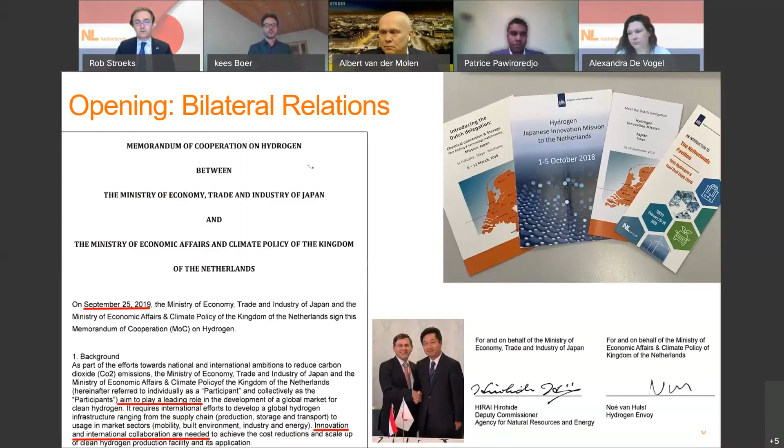I hope many participants today also listened in on the third hydrogen energy ministerial meeting held the day before yesterday, organized here in Tokyo by the Japanese government. I'd like to share a few takeaways relevant for our bilateral relations.

Four points. First, in the opening, the Executive Director of the International Energy Agency, Mr. Birol, announced three good pieces of news. One was that Mr. Noé van Hulst, who signed our MOC and was our Netherlands hydrogen envoy at the time, was announced as the new hydrogen advisor of the IEA. This is very nice news, I think.

The second takeaway was that our Minister of Economic Affairs and Climate Policy in the Netherlands, Mr. Eric Wiebes, gave a video message of four or five minutes, basically saying that the Netherlands is stimulating investments and innovation in hydrogen, putting the Netherlands on the map as a hydrogen hub and an important country in the EU in terms of backbone infrastructure.

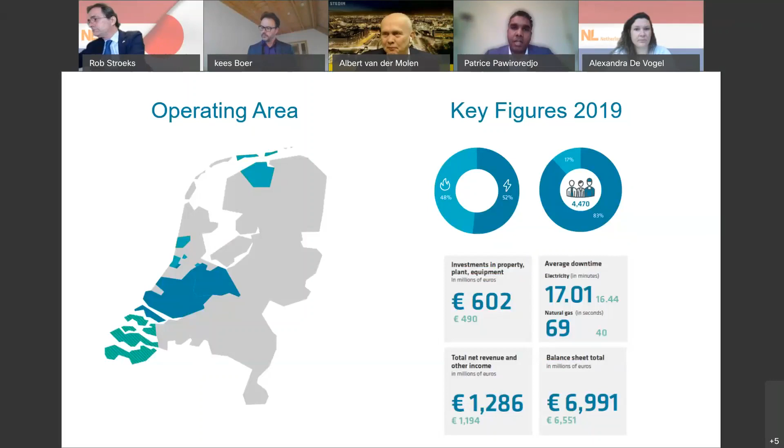So why are we interested in hydrogen? As you all know, the Netherlands has signed the Paris Agreement and translated those goals into national goals. Looking at the second target from the left, in the built environment in the Netherlands we need to reduce greenhouse gas emissions by 3.4 megatons by 2030, almost a 50% reduction. It may seem like the smallest target, but it's one of the most difficult to achieve because it's such a diverse area.

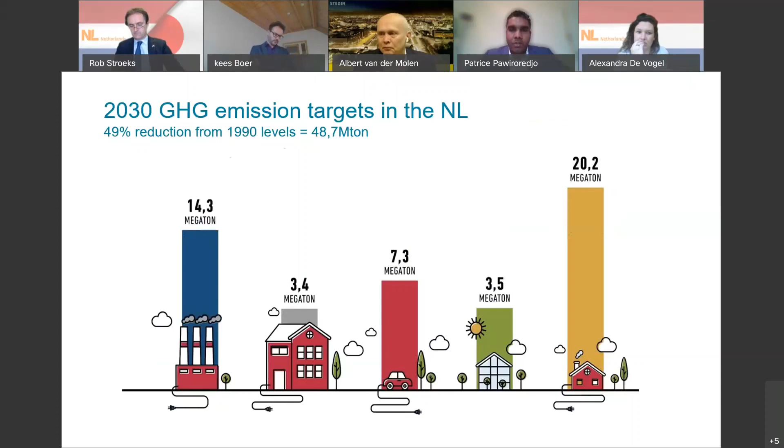Let's zoom in on that. It's well known in the Netherlands that we have very well developed and well-meshed gas connections. Almost every building in the Netherlands is connected to the gas distribution grid, which we see as a substantial asset for decarbonization. But we also have a relatively old building stock—more than half of the buildings are older than 45 years, and a significant part are older than 75 years. That presents a significant challenge for us.

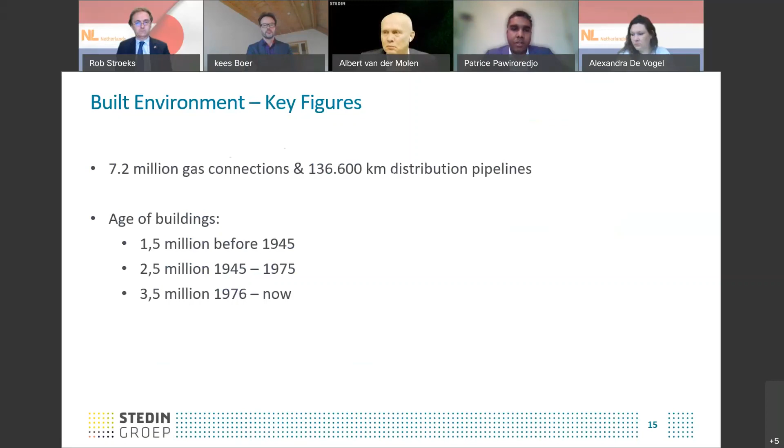The problem with these buildings is they're very old, and most will still be around in 2050. We need to find a way to transition the heating demand for all those buildings by then. By the end of next year, every municipality in the Netherlands needs to have a plan for an alternative to natural gas to heat the built environment in their area. From Stedin's perspective, we will investigate which options present the lowest societal cost in a specific area.

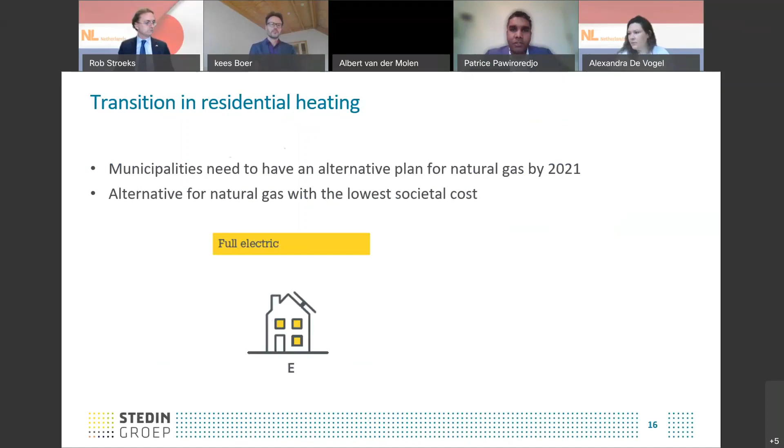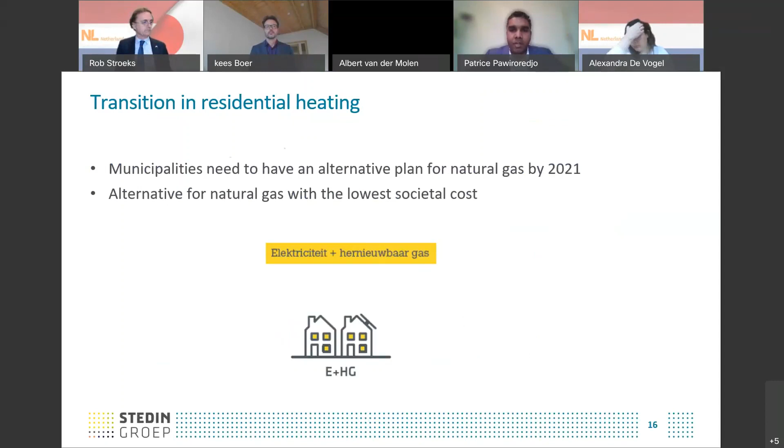Of course there are several options. You can go full electric and electrify all the buildings. You could go to electricity combined with a distributed or central district heating system. Or you can go to sustainable gas, making use of the current infrastructure.

At Stedin, we started to analyze all the neighborhoods in our area, and we came to the conclusion that if you look at the purple color in the pie charts, you can see that a sustainable gas solution could be the option at the least societal cost for a significant part of our surface area. So that's something we really need to investigate further: how are we going to operate that option of sustainable gas in our surface area?

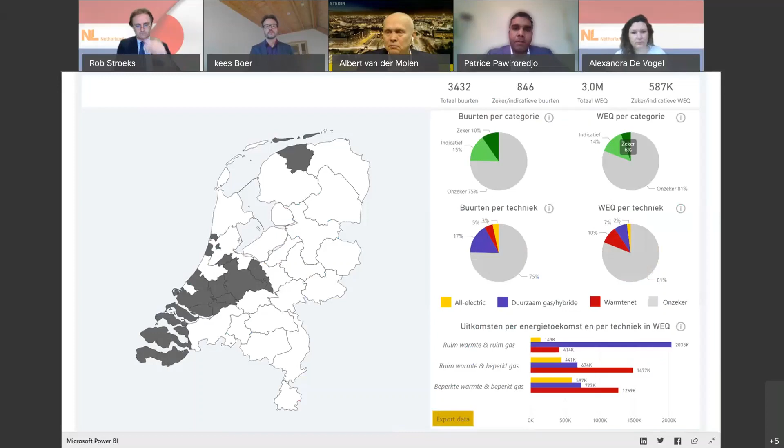So for hydrogen, specifically as sustainable gas, what are we doing to develop the capabilities to implement hydrogen in the built environment?

The goal of our innovation program is to develop the capabilities for the distribution of 100% hydrogen using the existing natural gas infrastructure in the Netherlands. The goal we've set, the point on the horizon for our program, is that in 2025 we want to convert the village of Stad aan 't Haringvliet to 100% hydrogen, from natural gas to 100% hydrogen, using the existing gas infrastructure. It's a village of about 600 houses and also some utility buildings. That's the program we're going to work on in the next five years to develop the capabilities to convert this village in the Netherlands.

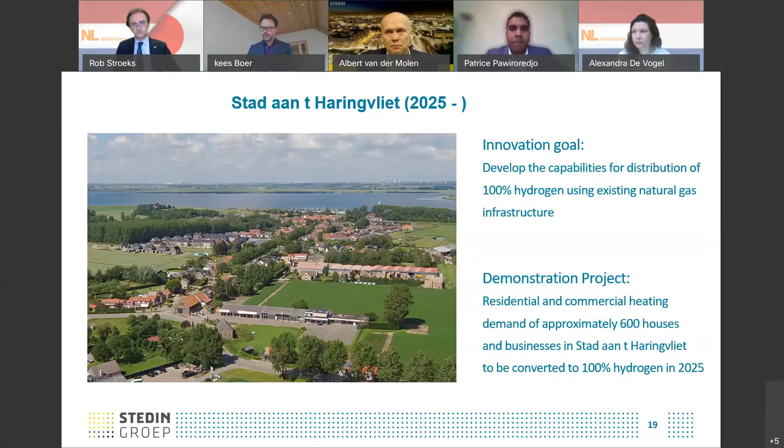Some of you are familiar with some of the steps we're putting in the meantime. One of those steps we started last year is the pilot location for the 100% hydrogen boilers. Some of you have visited already and are familiar with this program, where we have 3 hydrogen boilers at the moment being tested by Remeha, Bekaert, and Gastec. That's the first step we started last year.

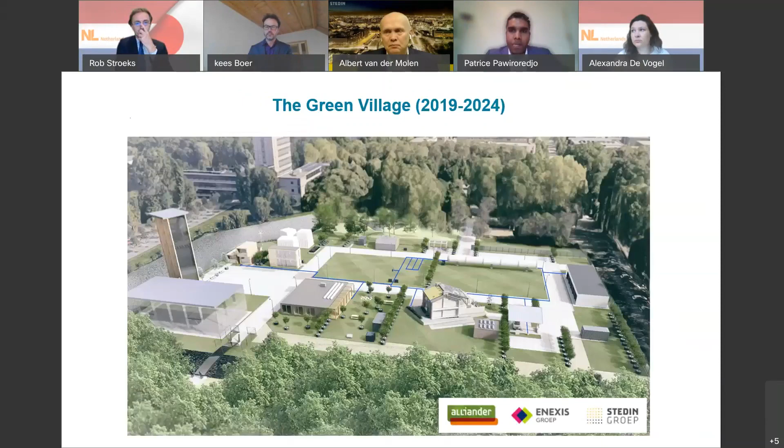At the Green Village, on the campus of the TU Delft, there's an experimental village, and what we're doing there, we are pleased to announce that we are in the startup phase of this project to get hydrogen flowing. We've constructed a natural gas grid as we would do normally, and we're going to transport hydrogen using the components of the natural gas grid. So you can see the regular components and materials we would use in the natural gas distribution grid in the Netherlands being tested for the transport of hydrogen. It also gives our colleagues and technicians a chance to really develop practical skills in working with hydrogen, and develop working operations and safety measures to work with hydrogen in the built environment. This is a project we're very enthusiastic about, and we hope to get it started by the end of this year.

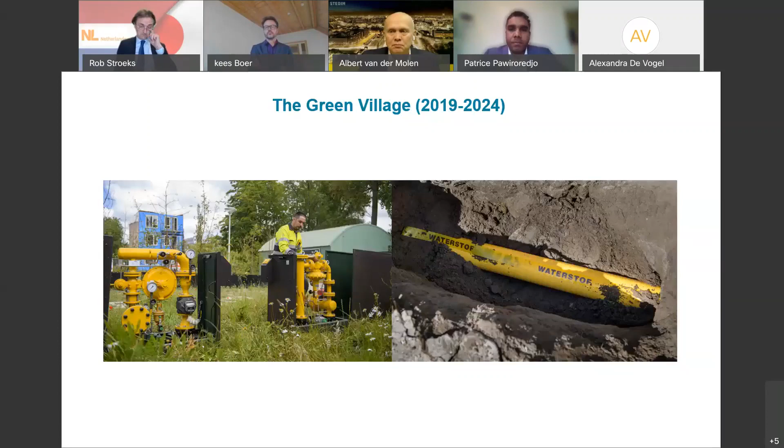Another project we're starting, actually next Monday I think, is that we are going to convert 14 abandoned houses in the city of Uithoorn. These are houses that are going to be demolished and are not inhabited at the moment. The part of the gas grid that supplies these houses will be sectioned off, and we're going to do some practical tests to see what kind of steps we need to take to convert an actual gas grid and actual houses to 100% hydrogen. With that, I'd like to share a short animation about the project that will be starting next Monday.

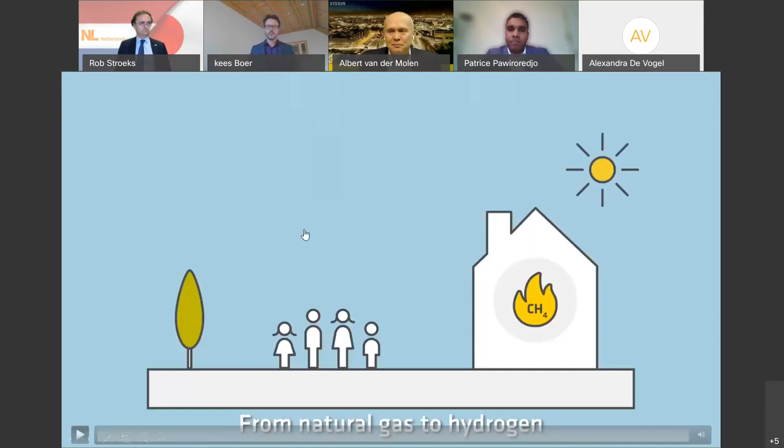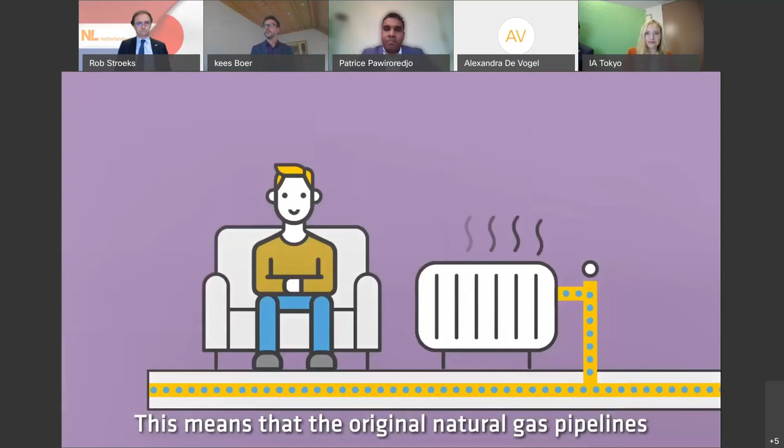From natural gas to hydrogen: this is how the conversion works. As a way of reducing CO2 emissions, the Dutch government is planning to stop the use of natural gas in homes by 2050. This means that the original natural gas pipelines can still be used to heat our homes in a sustainable manner, for example by using hydrogen gas.

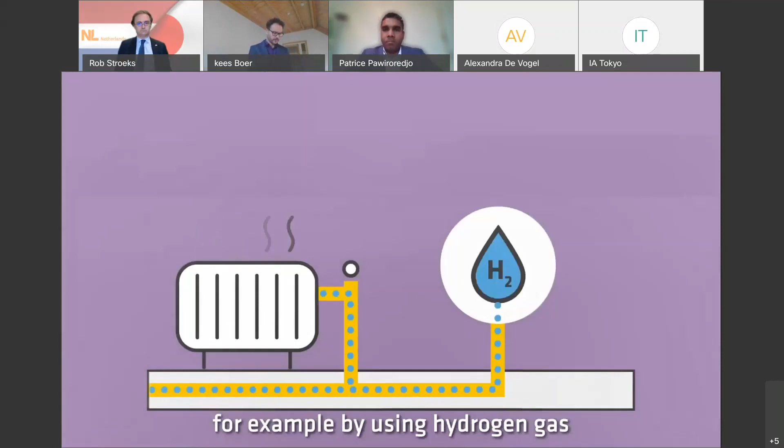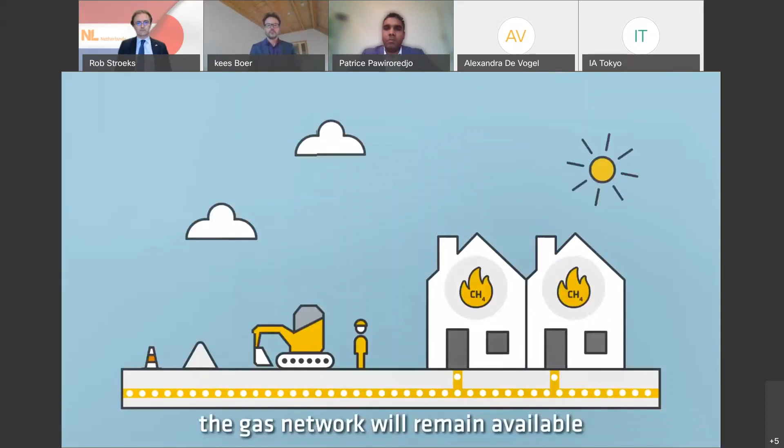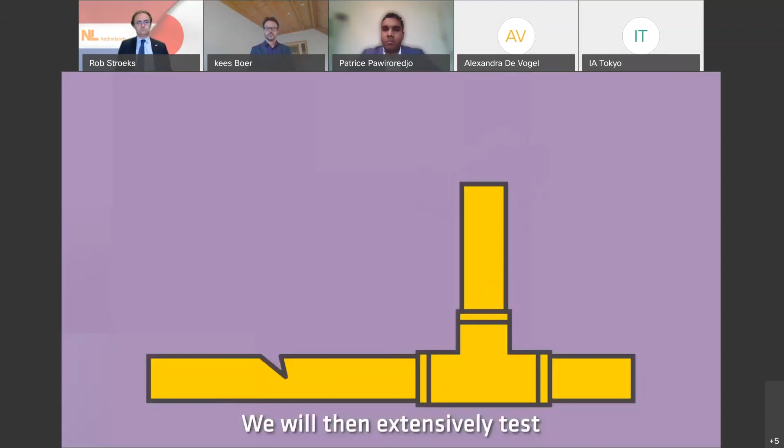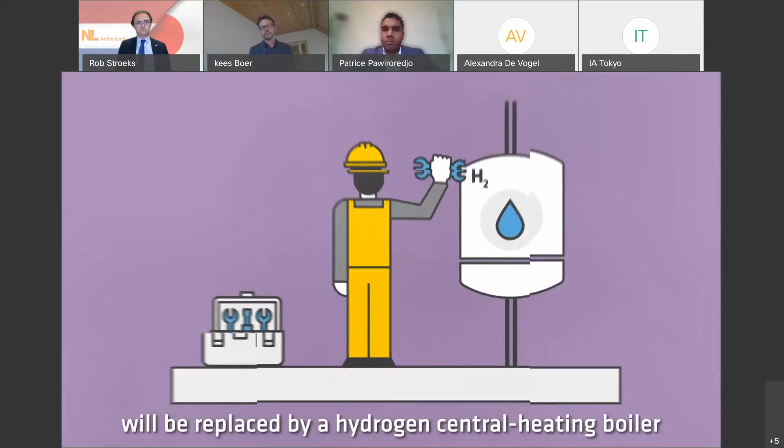For this reason, we will convert a number of unoccupied houses for a short time from natural gas to hydrogen, using the existing natural gas pipes in and around the houses. This allows us to gain experience and find out how long it will take to make a house suitable for hydrogen. During this conversion, the gas network will remain available to the surrounding houses, while the unoccupied houses will be disconnected from the main gas line in the street. We will then extensively test the existing gas network for any leaks. The natural gas central heating boiler in these houses will be replaced by a hydrogen central heating boiler, after which we will transport hydrogen through the pipes to these homes. We will only carry this out during daytime working hours and in close collaboration with experts from the safety region. Extensive research has already been carried out in recent years, and we are collaborating with reputable partners, both in theory and in practice. This is how we can confirm that hydrogen is just as safe as natural gas.

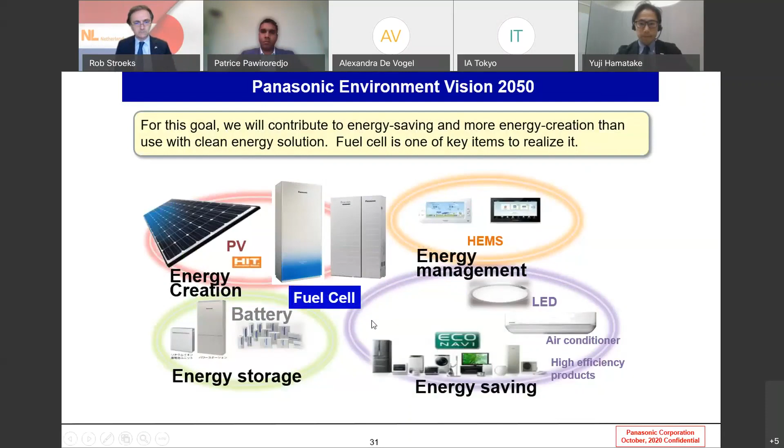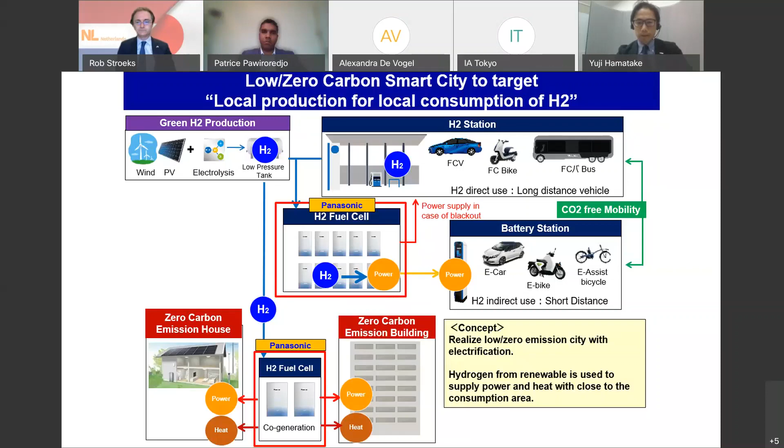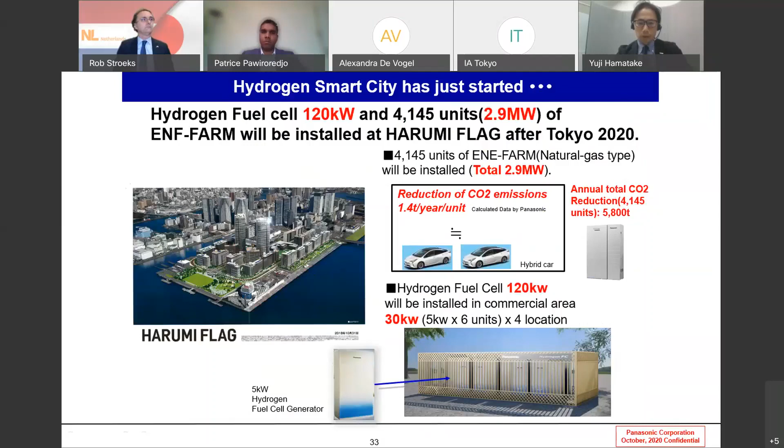This is just one example. A hydrogen smart city has just started in Japan. Panasonic installed a total output of 120 kilowatt hydrogen fuel cell and a total 2.9 megawatt of ENE-FARM, which is a natural gas type fuel cell. These fuel cells can generate both heat and power to contribute to such societies and communities, and can also reduce CO2 emissions—for instance, 6,000 tons from ENE-FARM. So this is a contribution to CO2 reduction.

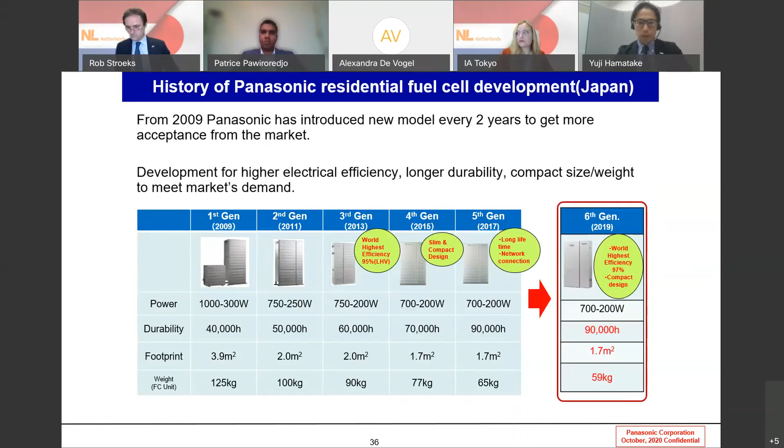With such circumstances, since 2009 Panasonic has been developing a new fuel cell every 2 years to get more acceptance from the market. We are developing to achieve more economical benefits, such as higher electric efficiency and longer durability, and also to meet market demands for physical footprint, realizing more compact size and weight. This is our current development in Japan.

We are also doing business together with our partners as joint development in Europe, like BDR Thermea Group, Remeha, and also Viessmann.

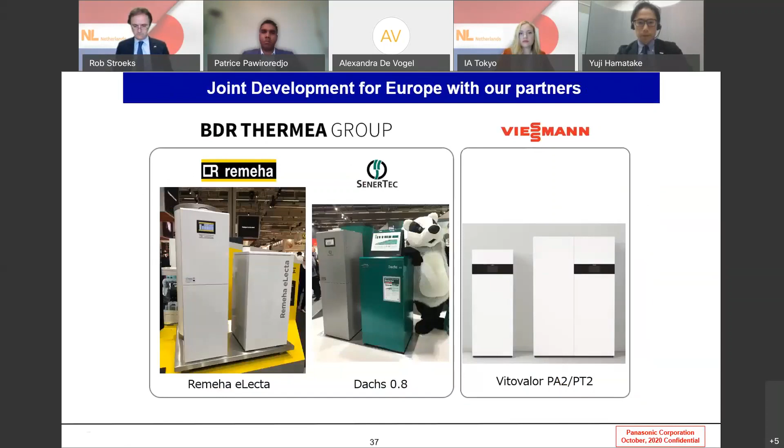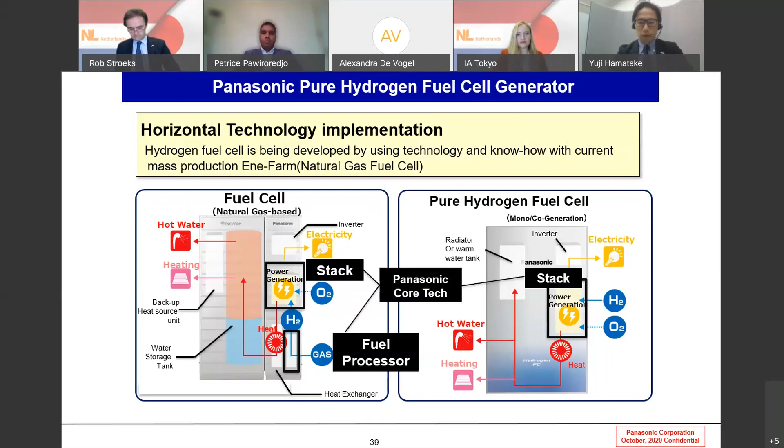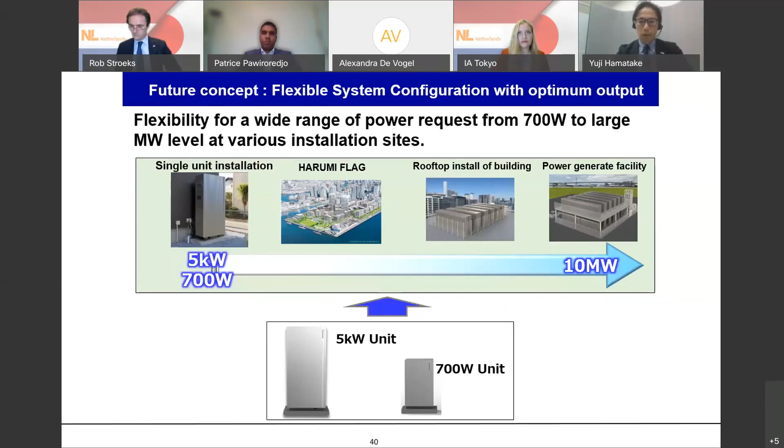This is our current developing model, the 5 kilowatt and also the 700 watt model. The 5 kilowatt model will be launched next October in Japan, and the 700 watt model is planned to launch end of 2022 for the European market.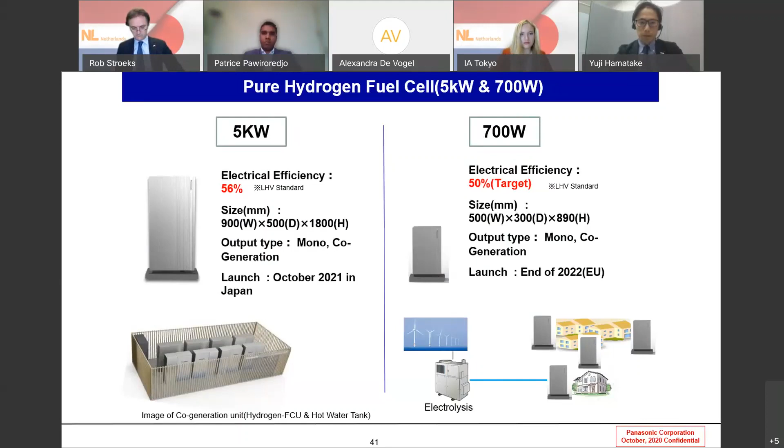We are also doing several field tests for this pure hydrogen fuel cell. This is one case in Yokohama, where we are setting a 5 kilowatt hydrogen fuel cell to supply electric power into the showroom. This is almost 2 years of field test experience.

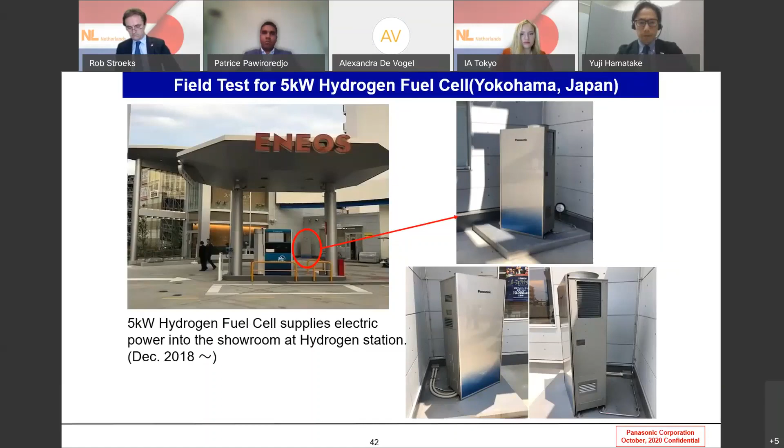This is a case in Yamanashi Prefecture, close to Mount Fuji, as a power-to-gas project. We set up 3 units of 5 kilowatts, total 15 kilowatts, to generate power and use it for the showrooms. This is almost 4 years of field testing.

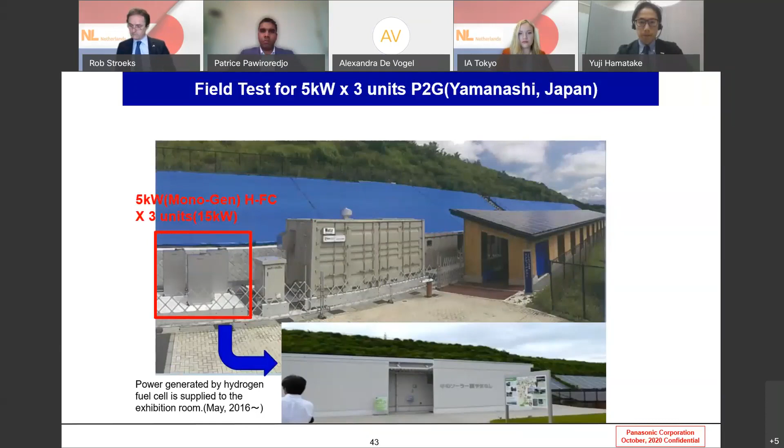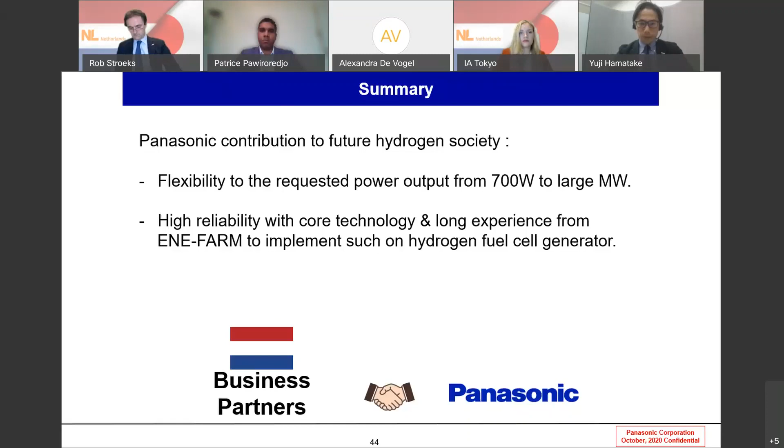This is the last page, a summary. Panasonic will contribute to future hydrogen societies with flexibility solutions for requested power output from 700 watts to large megawatts, and with high reliability of core technology and long experience coming from ENE-FARM natural gas fuel cell, implementing this into hydrogen fuel cell generators. I hope we can work together to realize such hydrogen societies in the future.

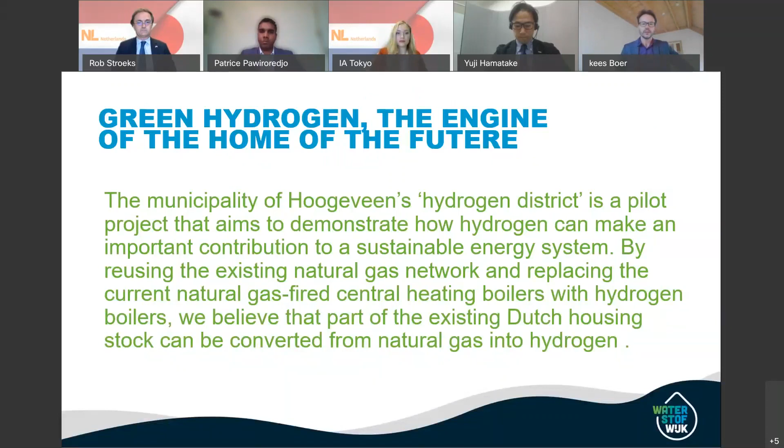What we do in Hoogeveen, like Stedin, is we want to show that it's possible to reuse the existing gas network for hydrogen and replace the central heating natural gas boiler with a hydrogen boiler.

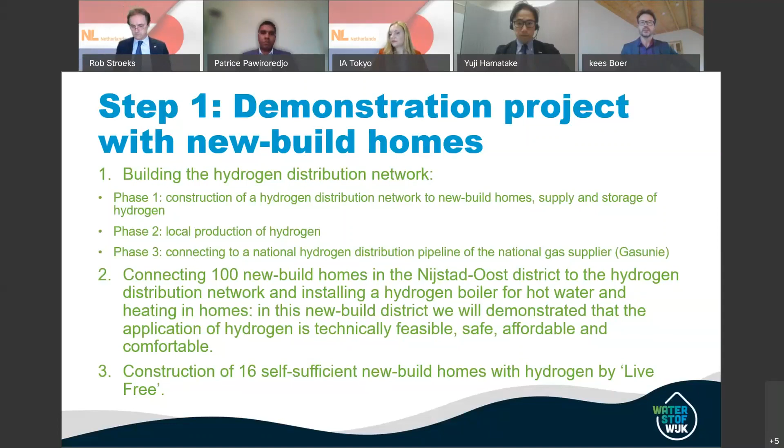We've got two phases. First, we will build 100 new built homes and connect them to a hydrogen distribution network, just like any existing district in Holland, to show that it's technically feasible, safe, affordable and comfortable for the inhabitants. A small project within our project is 16 self-sufficient homes, but I'll come to that later.

The main goal, like Stedin, is to go to existing districts and convert them from natural gas to hydrogen, using the existing distribution network and replacing the existing boilers with hydrogen boilers.

We will need certified hydrogen boilers at the end of 2021, and there isn't a certified boiler on the market yet, so we are now preparing a tender to make sure we have hydrogen boilers certified by the end of 2021.

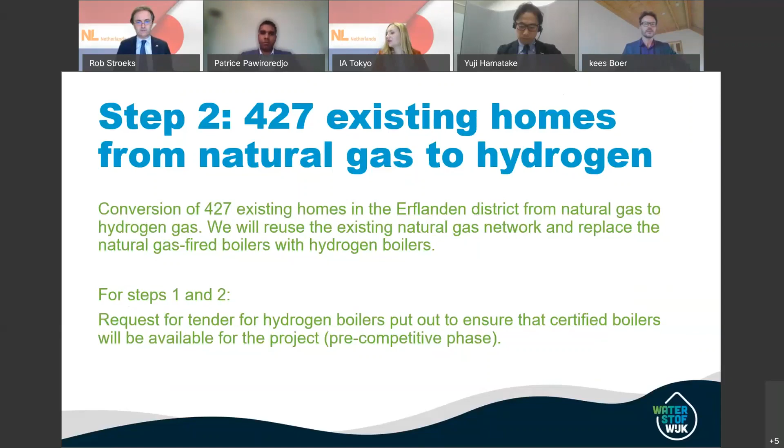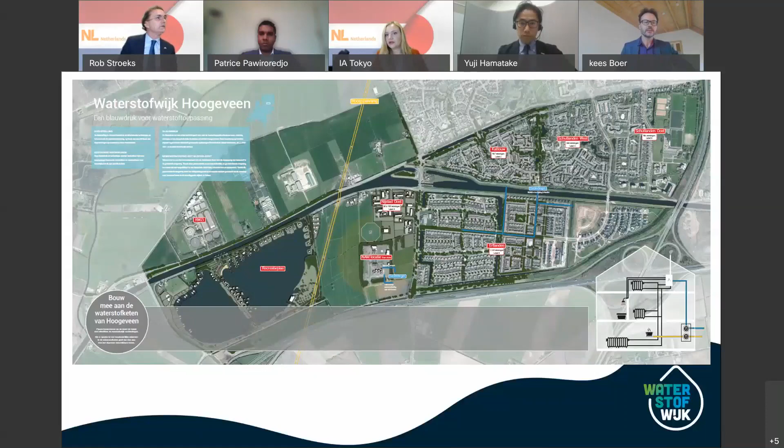We start with connecting the new built homes to the distribution network, and beneath will be the storage - I'll come to that later. Then we go slowly into the other neighborhood, like the project of Stedin, to learn how long it will take to convert to hydrogen in the street, and how long it will take to convert a single home.

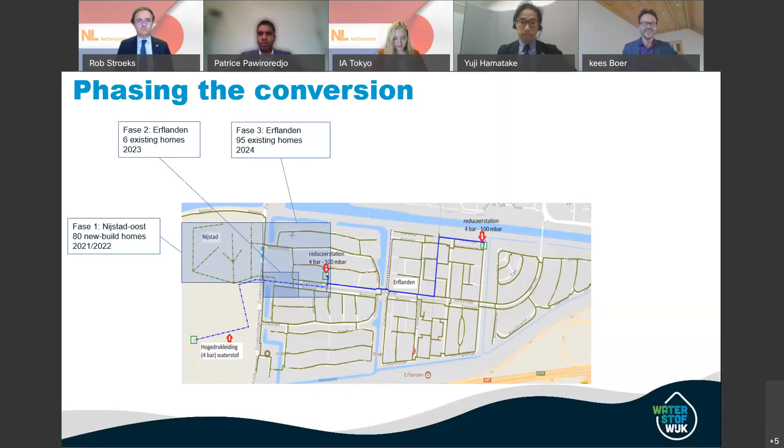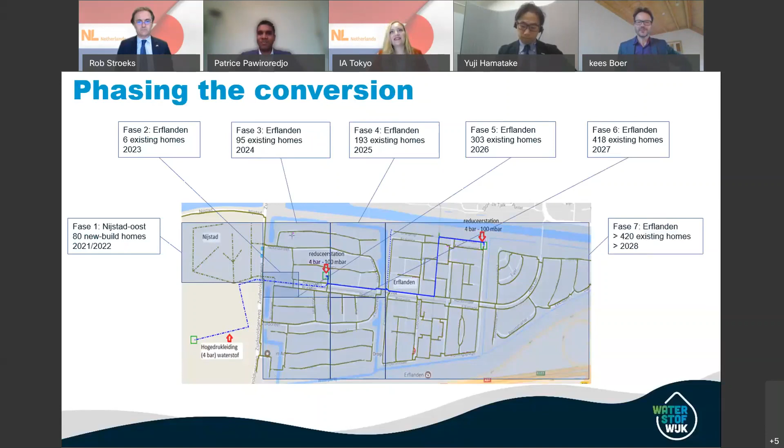We've got three phases. First we start with starting supply, and then we have an unloading station. There will be storage, and a pressure reduction station with odorization for safety purposes. This is similar to the natural gas system, and it will go into the distribution network for the new built homes and in the existing districts.

In the second phase, when the demand is increasing, we will go to local production with the solar farm. And we also will use that to balance the electricity network, because it's lacking capacity, so we can use the overproduction of electricity and convert it into hydrogen.

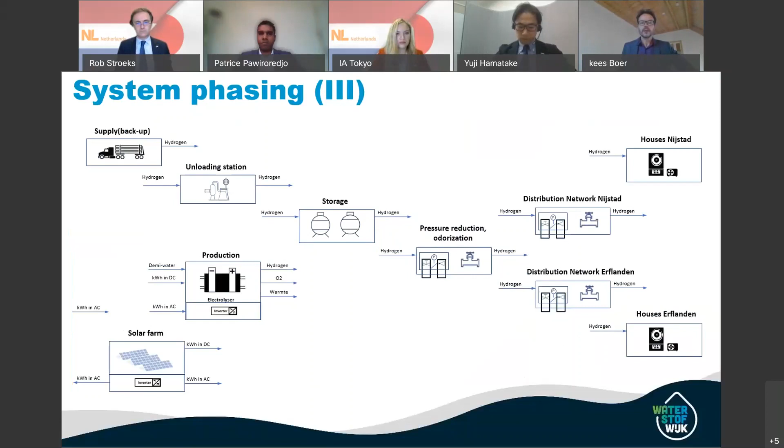In the last phase, when the demand is increasing further, we will connect to the main hydrogen pipeline of Hoogeveen, which they are developing right now.

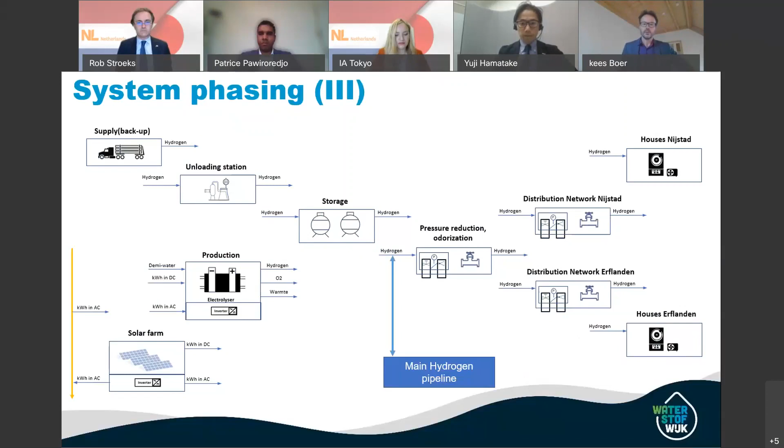What we will do in the houses is replace the boiler, the gas meter, and the house pressure regulator. We do some pressure testing. For safety purposes, we will put in hydrogen sensors. We will replace all other gas appliances, for example the cooking stove, with an electric one, and we have to do some adjustments in the kitchen.

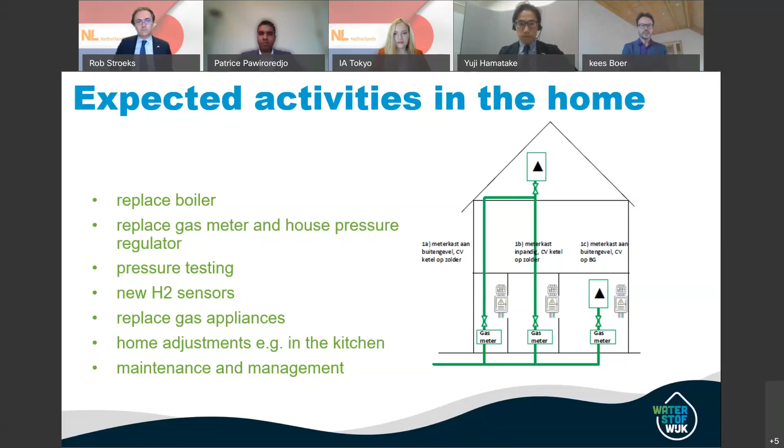This is a small project within the bigger project, containing 16 self-sufficient houses with a car as power plant. Together they have a micro power plant, and with the solar panels they produce hydrogen in the summer, and in the winter they convert it with a fuel cell to warmth for heating the house, and electricity to load up the battery.

They even have a small windmill to look after hydrogen production in the winter. They use the car as a power plant - they adapt the car so it can use the own produced hydrogen, converting that in the evening when it's in the garage to provide the houses with electricity and warmth via the fuel cell in the car.

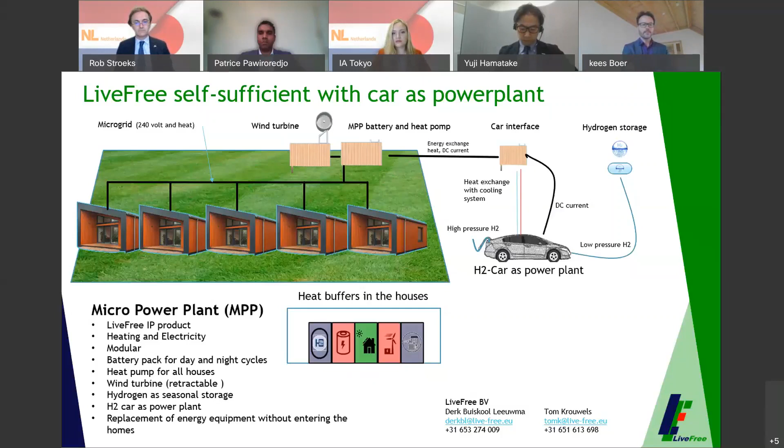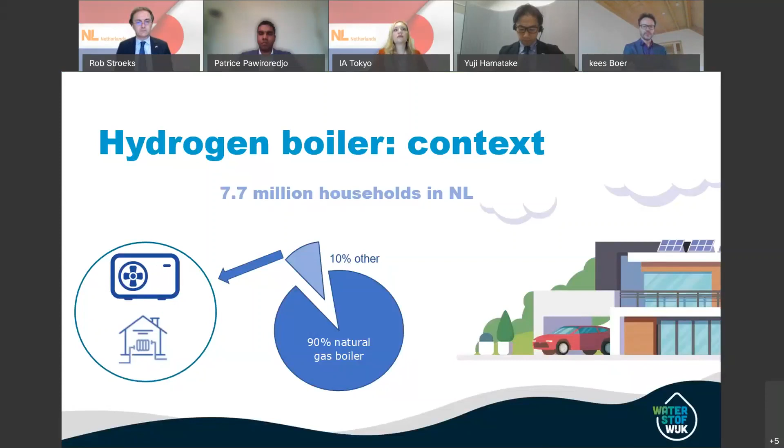Well, Stedin already mentioned it, but 90% of households in the Netherlands have a natural gas boiler. So it's really promising to use that fact to go to renewable energy.

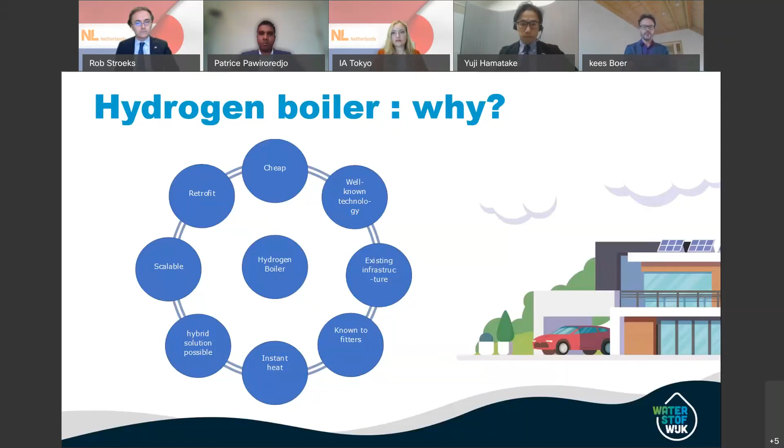In our opinion, it will be cheap. It's well-known technology. You can use the existing distribution network. It's known to fitters, it's known to the people, and also hybrid solutions are possible to connect the boiler with the heat pump.

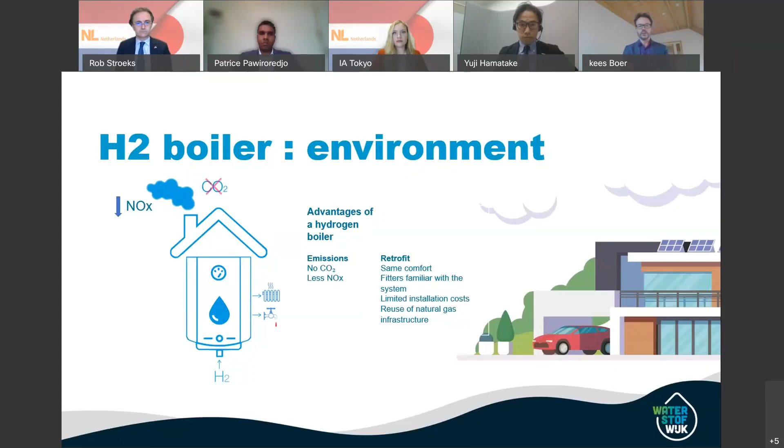The other advantages are that there is no carbon monoxide - burning hydrogen is much safer than natural gas. Research shows there is less NOx emission than with a natural gas boiler, and eventually there's no CO2 emissions.

What we did in the project is develop the hydrogen boiler. We looked into all legal and organizational things we have to adjust to scale it up in the Netherlands. We looked at how we can increase social support in relation to safety issues and costs. We looked into the spin-off for the industry - we think it's really a good scalable option. And we looked at the social cost and benefit analysis and compared it with others, for example full electric or district heating.

The collaboration with other parties has been really important in this project. We collaborated with 22 partners to develop this project, and it originated in the Hydrogen Open Innovation Platform in the Netherlands - a platform that believes the hydrogen economy can take over the natural gas economy, because of the amount of wind energy on the North Sea, and because we have to stop the gas winning. In the north, there is the connection to the national gas network.

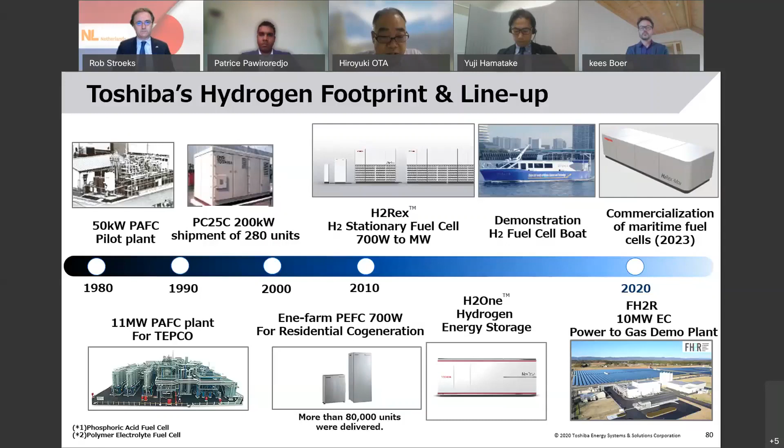Next page, please. As I said, this year, 5 companies, including Toshiba, acquired a subsidized demonstration project for the hydrogen fuel cell vessel. The companies will construct a fuel cell driving tourist vessel with a scale of 100 passengers and a liquid hydrogen refueling system in 2023, and operate them in 2024 in Tokyo Bay. Toshiba is now designing the maritime fuel cell that would be installed into the vessel in 2023. I prepared an abbreviated project introduction material, so please watch that for 3 minutes. Next page, please.

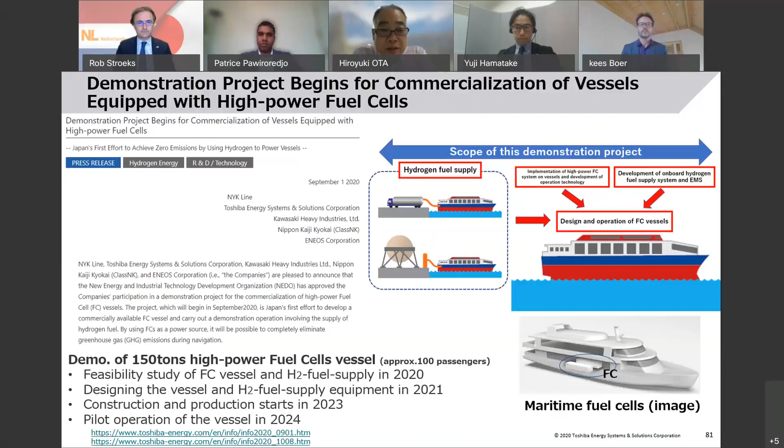Could you, yes. Maybe it would be awkward.

NYK is one of the world's largest shipping companies.

Toshiba has been providing technologies and solutions related to hydrogen ever since the company began developing fuel cell systems in the 1960s.

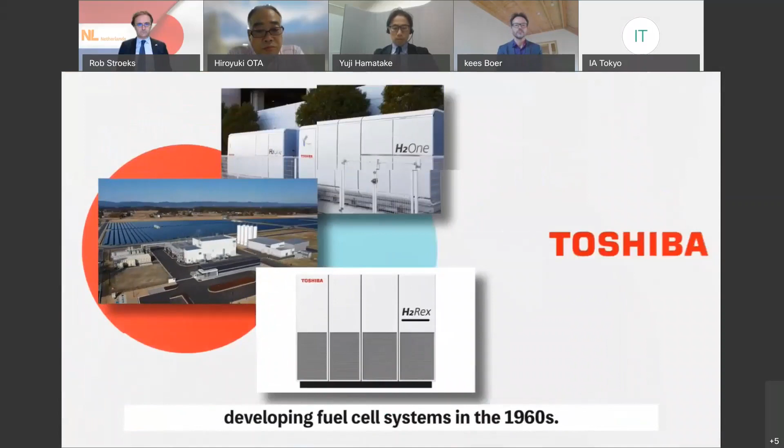Kawasaki Heavy Industries is promoting the use of hydrogen energy in the supply chain with the aim of eliminating CO2 emissions.

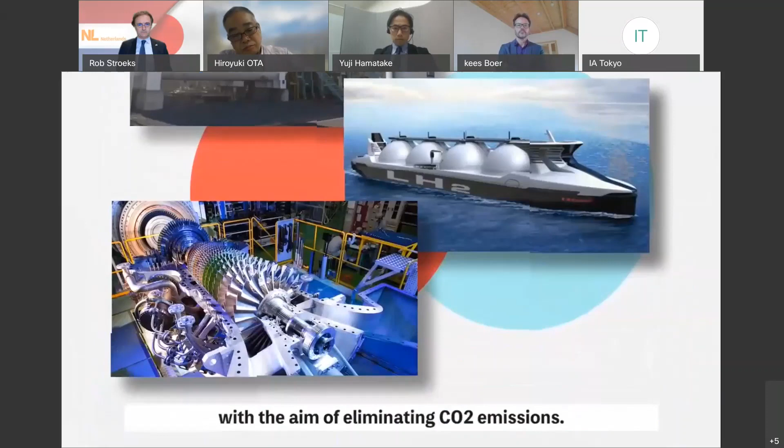ENEOS Corporation is an energy company that is also a leader in the construction of hydrogen supply infrastructure. And Class NK develops safety standards for hydrogen use as a third-party verification body.

These 5 companies have embarked on this fuel cell ship project, a project that aims to utilize hydrogen to power a fuel cell vessel at sea by bringing together the technical capabilities of these companies.

Fuel cell ships are future vessels that will be equipped with hydrogen fuel together with fuel cells to convert it to energy. The marine fuel, oil, and natural gas currently used to power ships emit CO2.

The hydrogen fuel is the ultimate clean energy that produces only water when consumed as fuel cells. Hydrogen fuel not only eliminates CO2 emissions from ships, but also can be used as an emergency power source in the event of a disaster to support recovery efforts at sea.

By promoting the use of hydrogen to power ships, we are helping to realize a hydrogen society. Japan, which is a maritime nation, aims to lead the world in the realization of the hydrogen society.

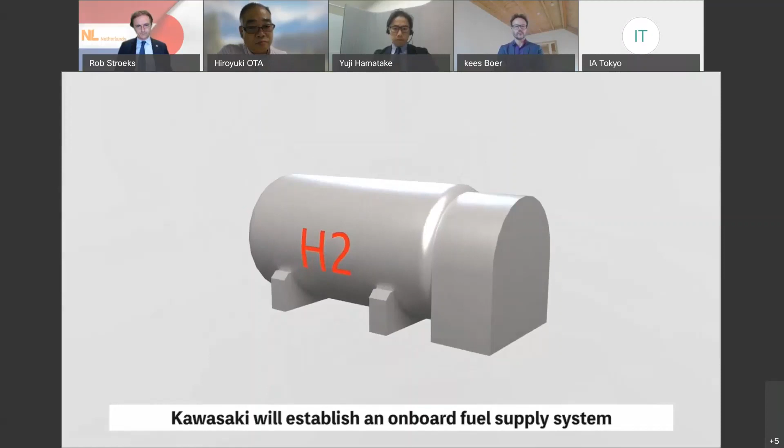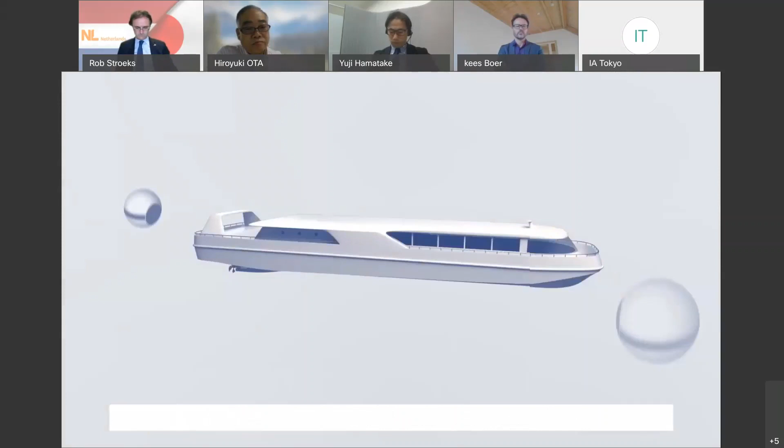NYK will develop, build, and operate the ship. Class NK will verify the safety of the vessel. And ENEOS Corporation will be in charge of supplying hydrogen fuel to the ship.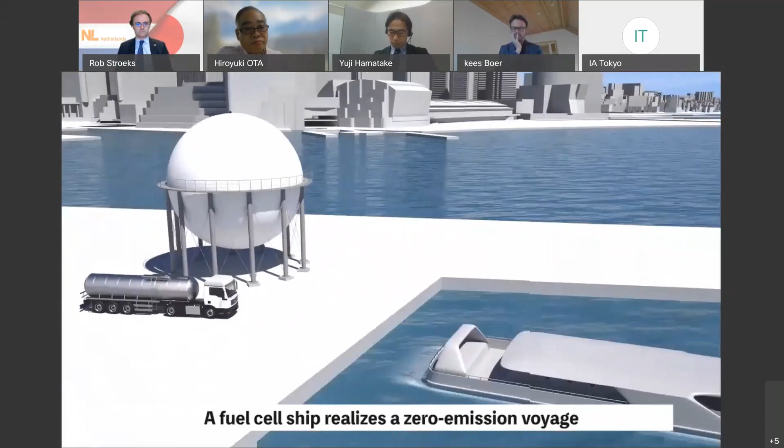A fuel cell ship realizes a zero-emission voyage, one that emits zero CO2. Hydrogen will change the sea. The fuel cell ship project begins at the port of Japan and brings us one step closer to cleaner shipping.

Thank you very much. Please change the next page. Well, please let me talk about our maritime fuel cell advantages.

In developing the maritime fuel cell, we would apply our widely proven stationary PEM fuel cell technology. The fuel cells, including our PEM technology, were already deployed in over 80,000 units in Japan.

Based on the stationary fuel cell technology, our maritime fuel cell would enable continuous maximum output operation over a long life. Especially, our fuel cell has the distinction of having an 80,000 hour design life.

You can also expect high power generation efficiency of 48%. Adding to it, if you have the case of using hot water, the fuel cell can serve 60 degree C water simultaneously while power generating. The launching to the market would be 2023.

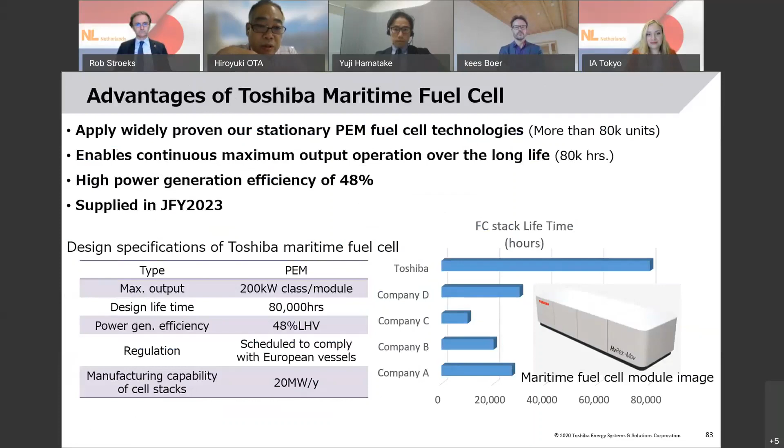Yes, well, we are expecting participation in the Europe business using this maritime fuel cell in collaboration with EU companies, including, of course, Netherlands companies. Toshiba can provide the fuel cell technologies, products, or parts through the partnerships.

And we can discuss all items over marketing, sales, and local manufacturing. Adding, we don't persist in maritime application only. Of course, it's okay to discuss items concerning trains and stationary use. This is a common technology. If you would have some interest, please contact us. Thank you very much.

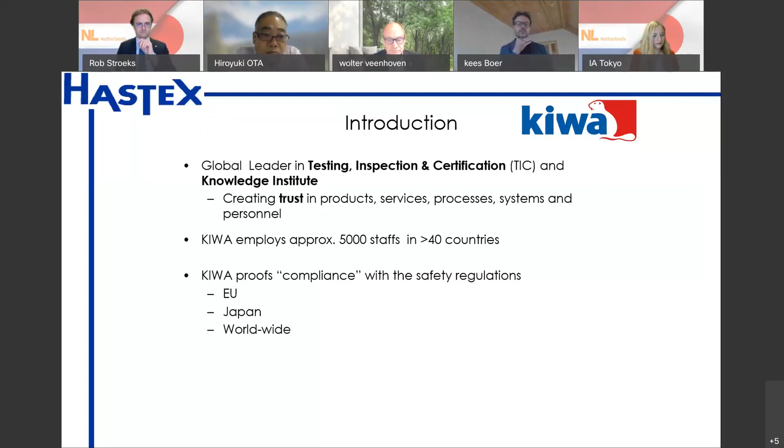In smart cities, such as cities with connected traffic lights to manage traffic, and with factories and buildings with connected devices to improve the management of scarce resources, appliances and devices are connected, data is collected and processed in the cloud, and provide information for decisions, and more for decisions to be taken automatically.

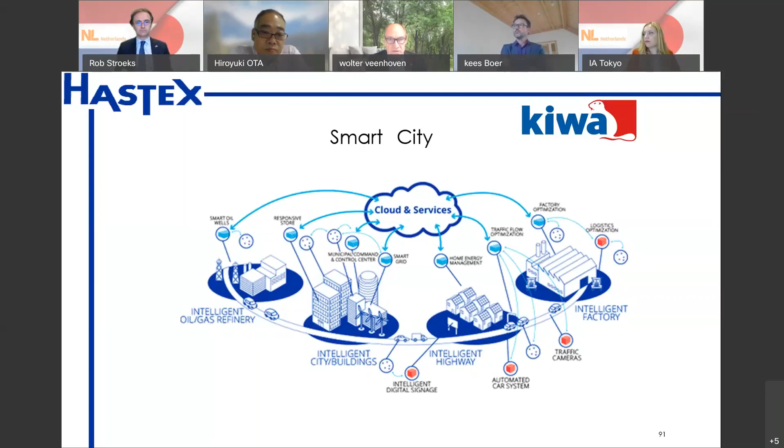In smart cities, the connected devices in buildings, homes, factories, and communities form the Internet of Things, or IoT, and can make the systems where they are part intelligent: intelligent factories and buildings, smart logistics, smart hydrogen refilling stations, smart mobility, intelligent roads, intelligent fuel cell vehicles, automatic driving, smart parking, smart grid, smart metering, home energy management systems, intelligent thermostats, remote control devices. Too many to mention.

The things are connected to data centers via wireless networks, such as networks in maritime and aerospace environments, and mobile networks such as 3G, 4G, 5G, and future 6G, GSM, Bluetooth, Wi-Fi, RFID, NFC. The rapid growth of the Internet of Things requires solutions for a reliable zero-carbon energy supply. Photovoltaic and wind, and the application of power to gas, is a solution. Manufacturers in Japan develop new products such as hydrogen refilling stations, electrolyzers, fuel cells, micro-cogenerators, and offer other fuel cell applications. The safe use of hydrogen requires transparent, harmonized regulations and strict compliance with these regulations. In the hydrogen society, the use of hydrogen becomes the new standard.

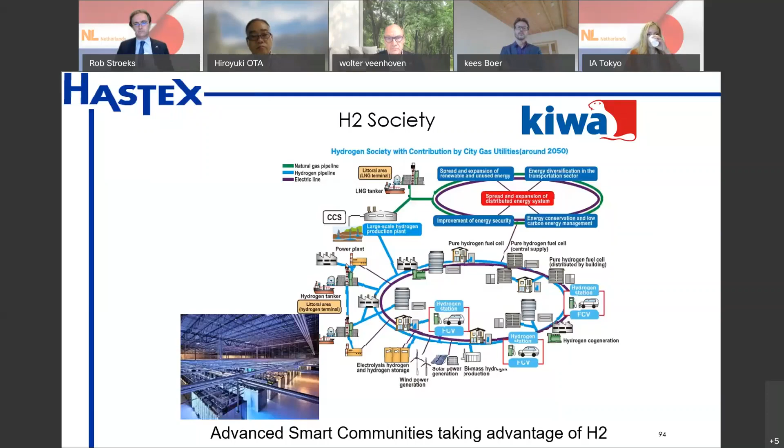KIWA, as a testing, inspection, and certification body, is specialized in assisting manufacturers to demonstrate compliance with these safety regulations. KIWA is a third party or notified body for the European regulations and directives. It has laboratories with ISO IEC 17025 accreditation, has Europe's largest hydrogen laboratory for testing with real hydrogen under high pressure and high flow conditions. It tests according to the technical standards of Europe, EN standards, the global ISO IEC standards, R134, GTR13, HGV, and HPRD.

KIWA issues test reports and certificates for materials, infrastructure components, hydrogen cylinders, electrolyzers, fuel cell vehicles, micro CHPs, photovoltaic, also safety electronics, and what is becoming more and more important, also the safety integrity level of software, SIL.

KIWA cooperates with authorities in Japan, among others with KHK and JIA, and in Germany with the KBA, and with the authorities in the United States and in Canada. KIWA, as a knowledge institute, assists private and public organizations by offering feasibility studies, redesigning of appliances, and demonstration projects.

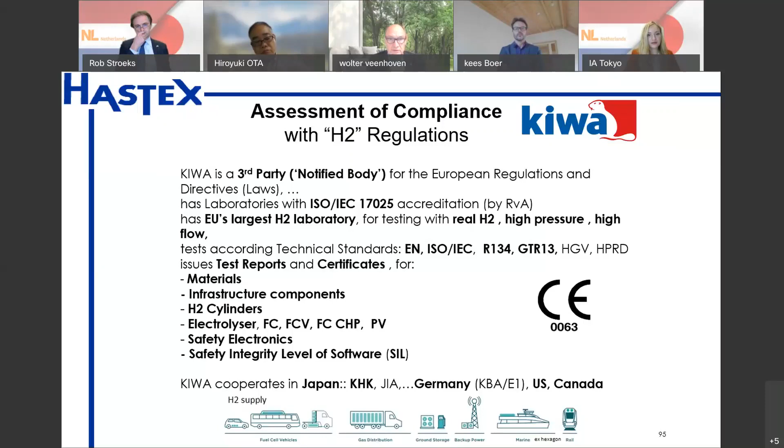Simultaneously, we are in the transition to the digital society. In Japan, the importance of this transition can be witnessed in the redesigning of the government, with the establishment of a special ministry for digitalization.

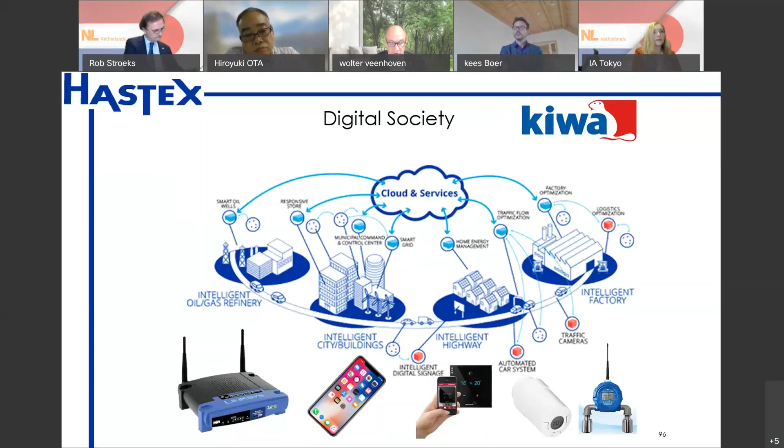Japanese manufacturers continuously develop novel technologies to make wireless data communication faster and more efficient. The Internet of Things expands rapidly. Reliable wireless technologies, referred to as radio, are required to not cause harmful waves, not to disturb the working of other things. In a digital society, the safety and reliability of wireless devices therefore needs very strict compliance with the regulations. And it is understandable that the manufacturer of these devices demonstrates that his products are in compliance with these regulations, and maybe harmonized regulations, before selling his products on the market.

KIWA is also specialized in assisting manufacturers to demonstrate compliance with safety regulations as a third party for testing, inspection, and certification of wireless communication devices. KIWA has extensive testing facilities in the Netherlands, among others with a test facility from 9 kHz to 120 GHz. Besides, KIWA is outsourcing tests to laboratories which meet the highest requirements from KIWA.

KIWA is designated for approvals based on certification schemes applicable in Japan and in Europe and worldwide. In Europe for the Radio Equipment Directive and the Maritime Equipment Directive. And in Japan by the Ministry of Internal Affairs and Communication for the Radio Law and Telecommunications Business Law, and in America by FCC, and in Canada by ISED.

KIWA's subsidiary, Telefication, was the first foreign certification accredited body who was accredited by the authorities in Japan, and who has still the number 1 market share among the foreign conformity assessment bodies in Japan. KIWA cooperates on the national level in Japan.

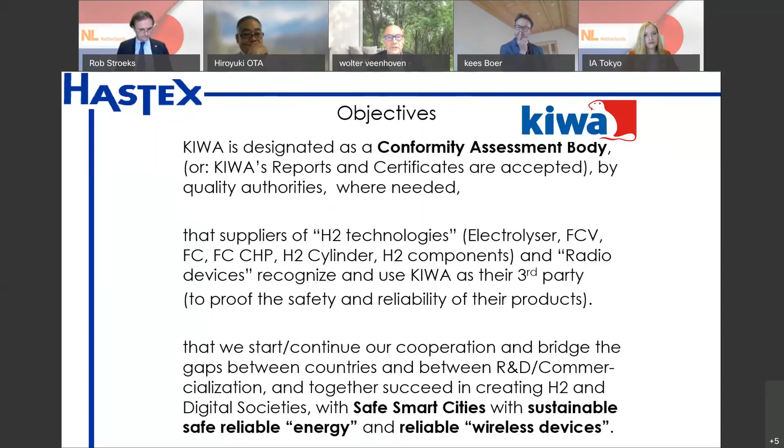Finally, our objective is that we start new, but also continue our existing cooperation and bridge the gaps between countries and between product development and commercialization. Further succeed in creating the hydrogen and digital societies with safe, reliable energy supply and reliable wireless devices. Thank you very much for your attention.